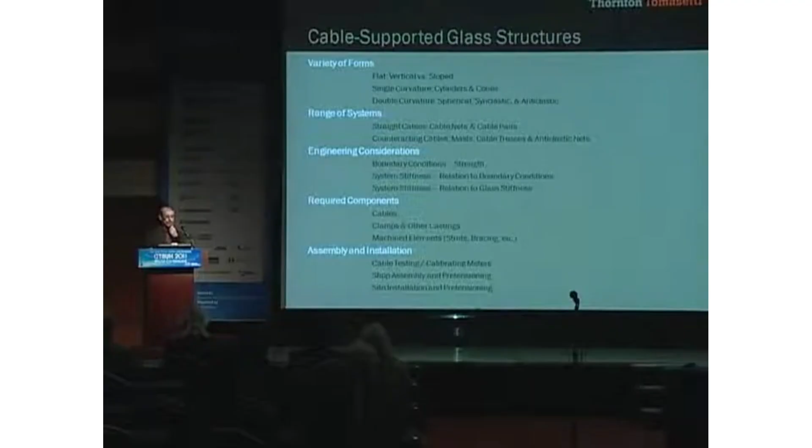This is what I was hoping to talk about, though I don't think we'll have time to cover all of it. First, I want to talk about the variety of forms available with cable-supported systems. Then the types of systems there are. We'll cover some engineering issues, especially boundary conditions. And ideally, we'd like to talk about some of the required components as well as installation issues.

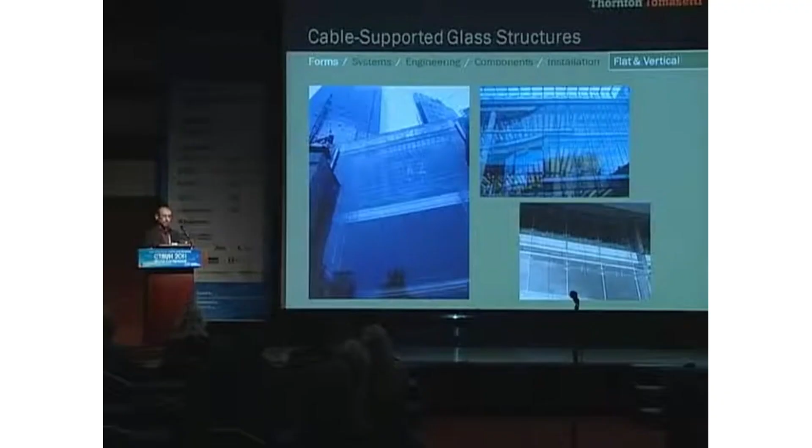Okay, so forms that are available. You can do them flat and vertical—it's nice and simple. Or you can do them flat and sloped. But flat and sloped, you would think is the same, but it's not. I'm not used to using a microphone because I need to stand in front of you, so I'm going to shout a little bit. When you have a flat building, a flat facade hung with cables, it just wants to hang straight. But as soon as you want to slope it and lean it back, now it wants to hang like a wet towel.

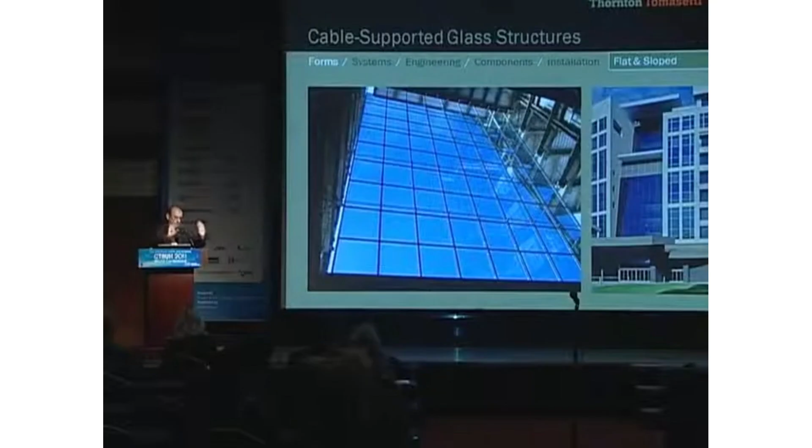So the middle wants to sag. When you work with these kinds of systems, you have to engineer and detail a series of props so that all of the points actually push the glass out into a spherical pattern. But when you add the glass weight on, it actually deflects back into being a flat form again. So this is a lot more complicated than it looks.

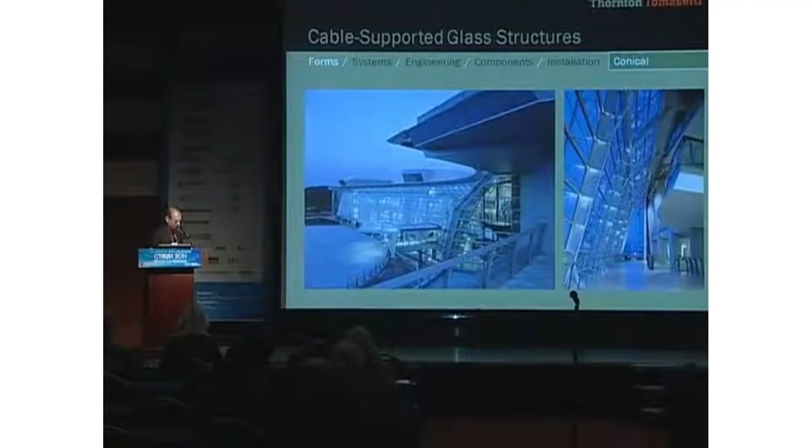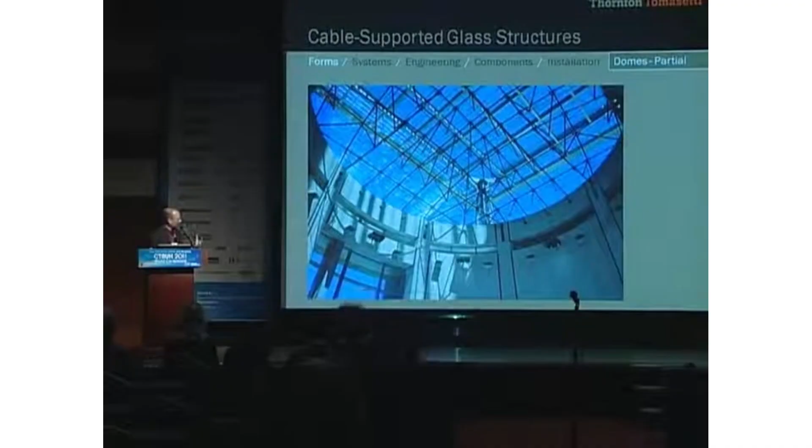You can also do cylindrical shapes, whether you're putting the framing to the inside or to the outside. Again, you can do conical shapes, which are sloped cylinders, and again you have the same problem of the wet towel, so you have to prop everything forward again. Then you can do dome shapes, hemispheres. And hemispheres aren't always hemispheres—sometimes spherical forms are just kind of a lens, which may be the top of a hemisphere.

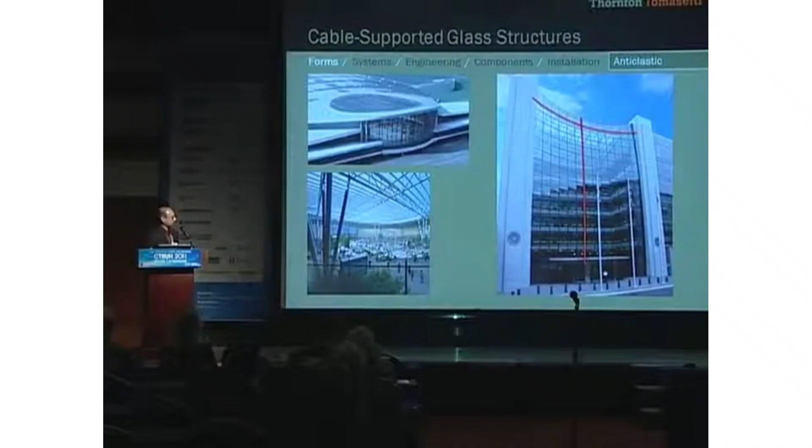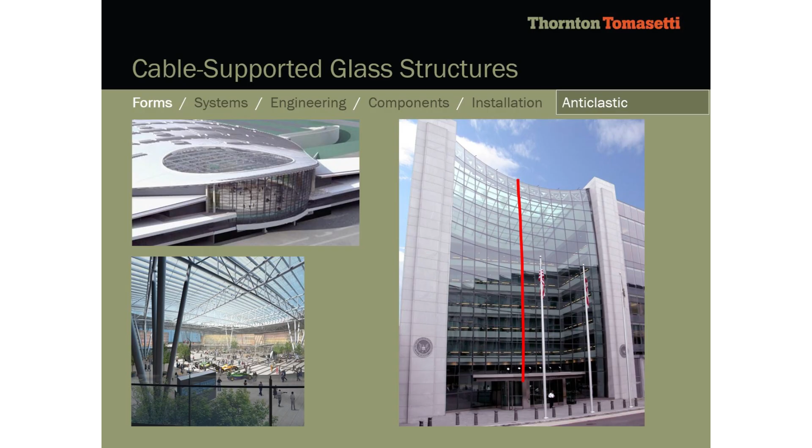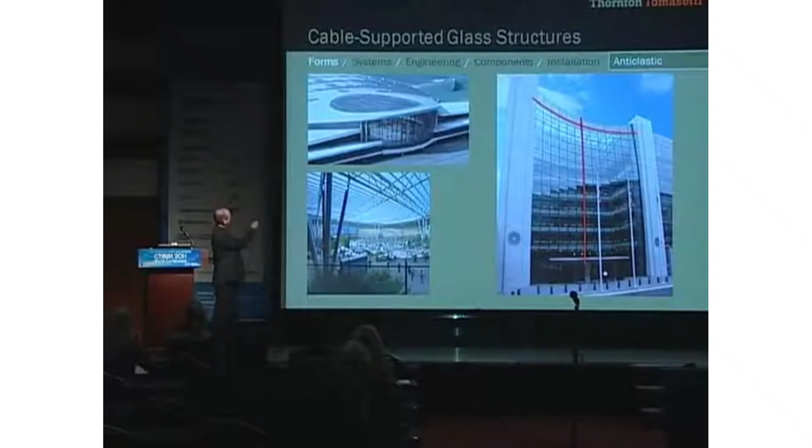And then lastly, we have something called anticlastic. Anticlastic is not the opposite of clastic—anticlastic is the opposite of something called synclastic. What it means is that the curves that generate the form have their radius on opposing sides of the form. If we look at the horizontal, this curve is concave, facing out towards all of you. But the vertical curve here is convex, facing back into the building. So the form is generated by two sets of curves, but from opposing sides of the form. This is an anticlastic form, more commonly called a potato chip or a saddle shape.

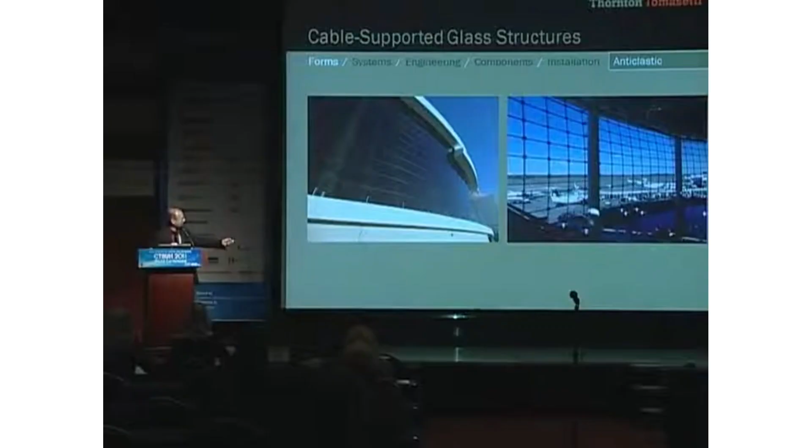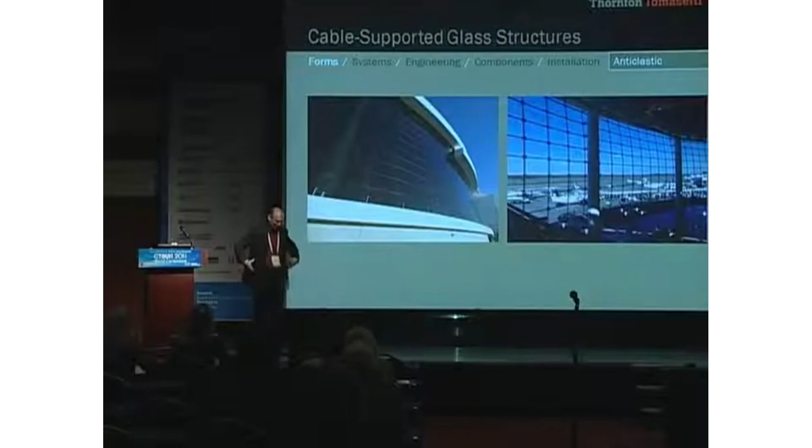This is a fantastic example, SeaTac Airport, of an anti-clastic wall. It's basically just a cylinder form, with a series of cables running horizontally. When you pull those horizontal cables, essentially it's like putting on a girdle. You start maybe just vertical and flat, but when you pull them tight, now it pulls in the middle.

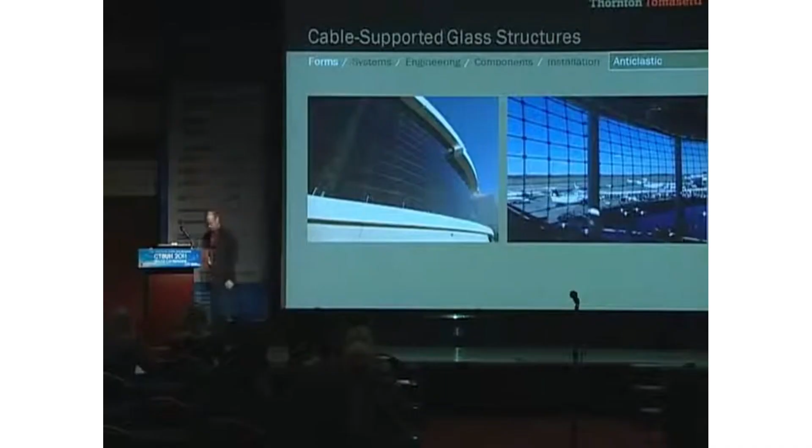And it creates this anti-clastic form. So really, this is just generated by the two cables pulling against each other. The horizontal cables are pulling around the building, which is curved, and the vertical cables just want to take a straight line. But because of the horizontal cables, they actually pull in, like that.

Okay, so now let's talk about systems. We have cable nets, and this is actually a cable net. I only refer to these as cable nets. This means that we've got two sets of cables, one running horizontal, one running vertical. It's a true net, if you will.

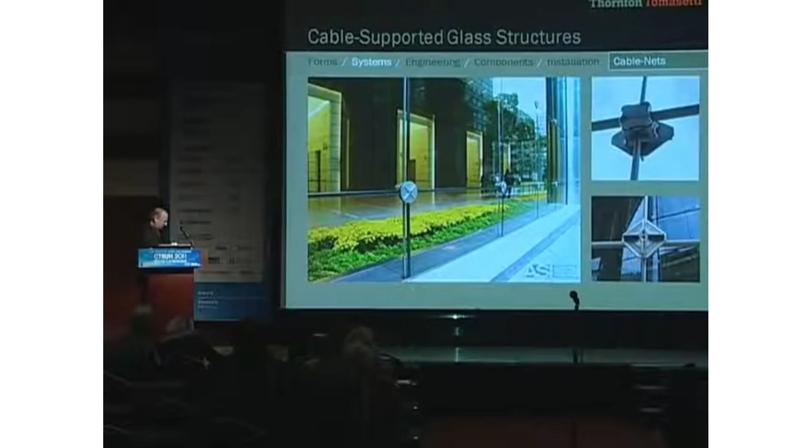You can do anti-clastic forms with cable nets. This has two cables running both directions. This is pairs of cables, though, so I don't call this a cable net.

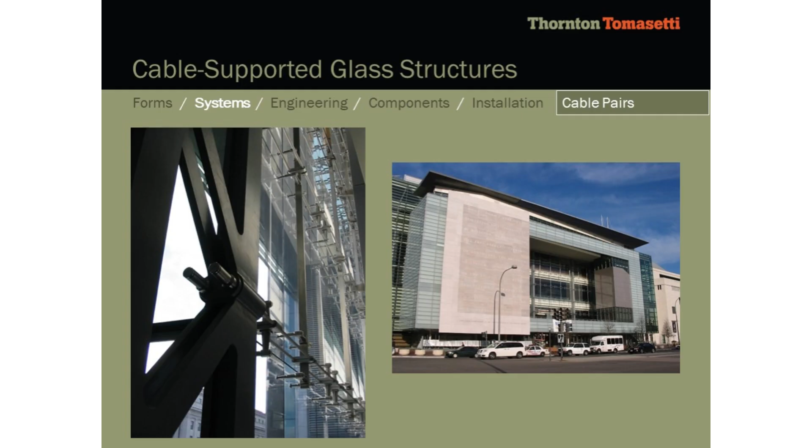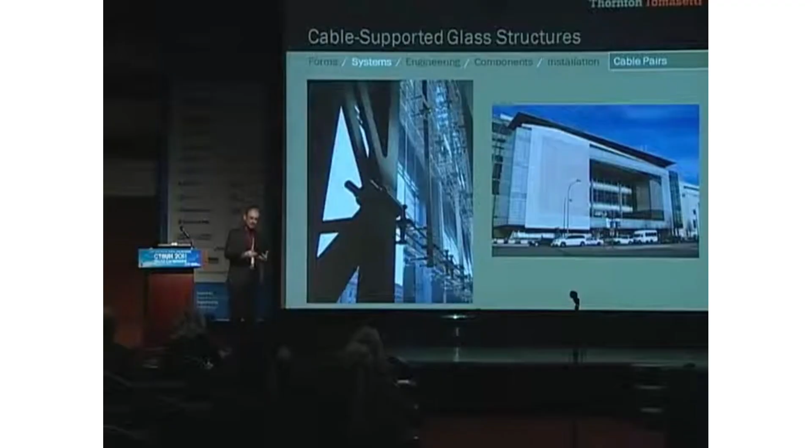So if you see here, there's pairs of cables running horizontally, and then there's stainless steel hanger bars, which take the dead load of the system. So it's very similar to being a cable net, because if it was a cable net, we would have a vertical cable here and one horizontal. But since we lost that one vertical cable that's no longer acting in tension, we basically had to take that vertical cable and turn it horizontal and add it here, because we still have the same structural requirements. We still need the same amount of tension in the system.

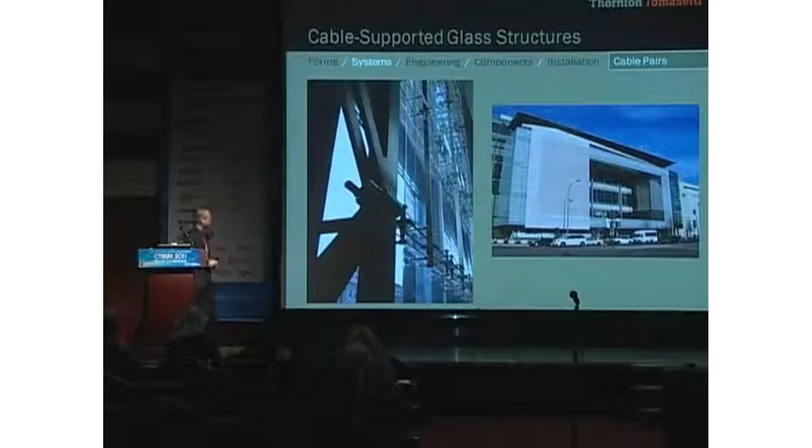So another example of horizontal cable pairs, again with a steel system being the suspension or support for dead load.

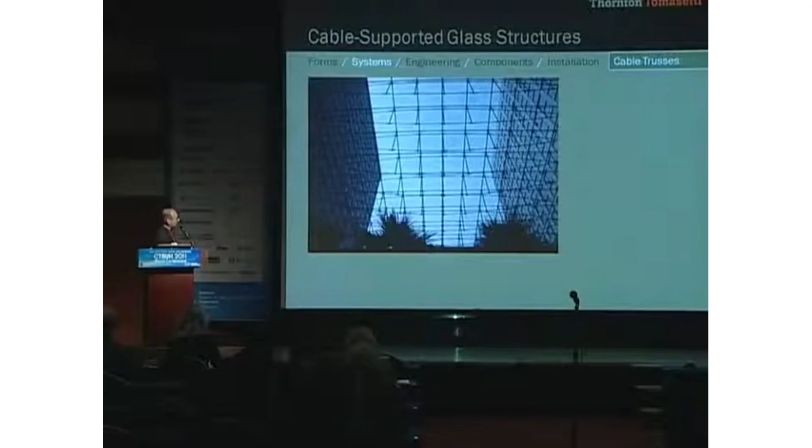So then the next system would be cable trusses. And cable trusses have cables which basically oppose each other. This is very similar to the anti-clastic cable net, where basically you've got one set of cables pulling down on the skylight, and you've got another set of cables that are pulling up on the skylight. And basically they resist each other, and they resist positive and negative wind loads.

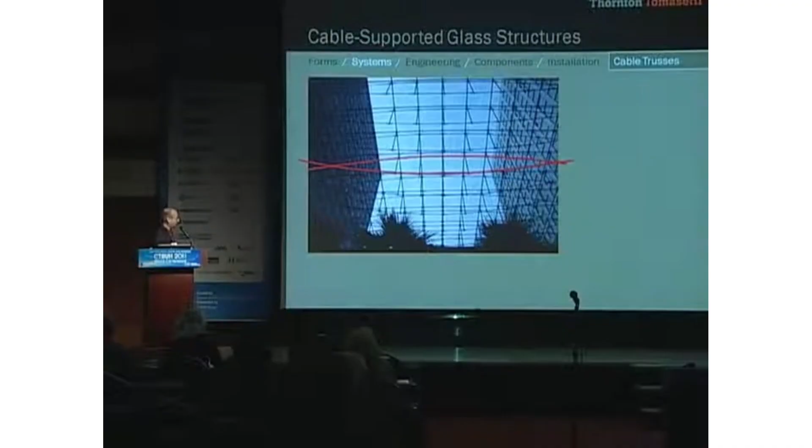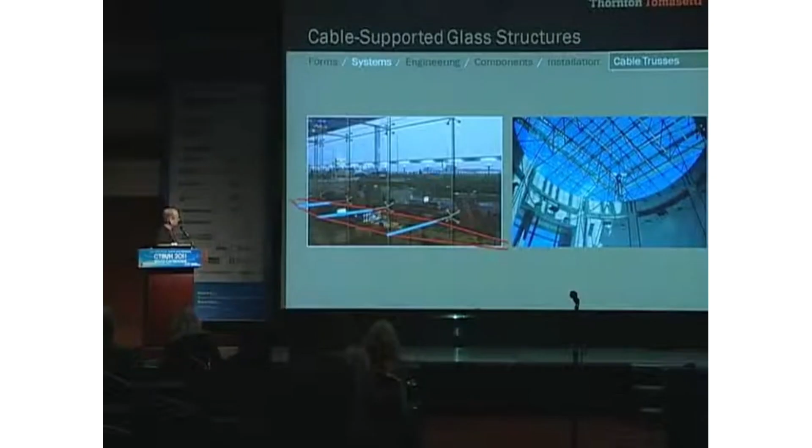These are more cable trusses. There you can see the horizontal cable truss. And these are the struts that you use in order to keep those cables opposing each other. So this is a cable truss in plan view, maybe.

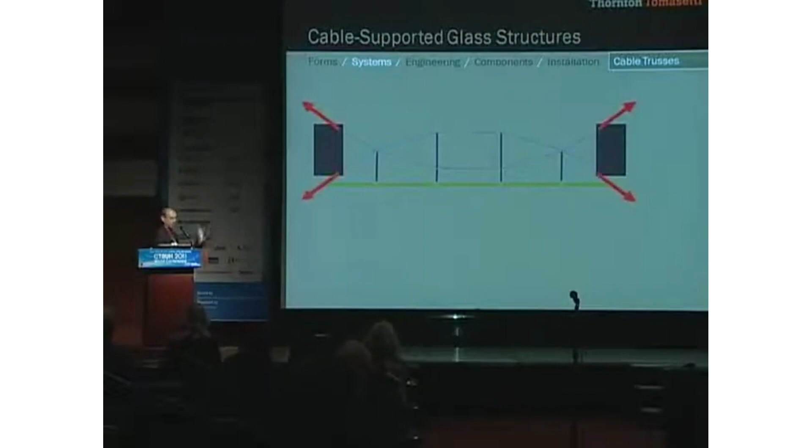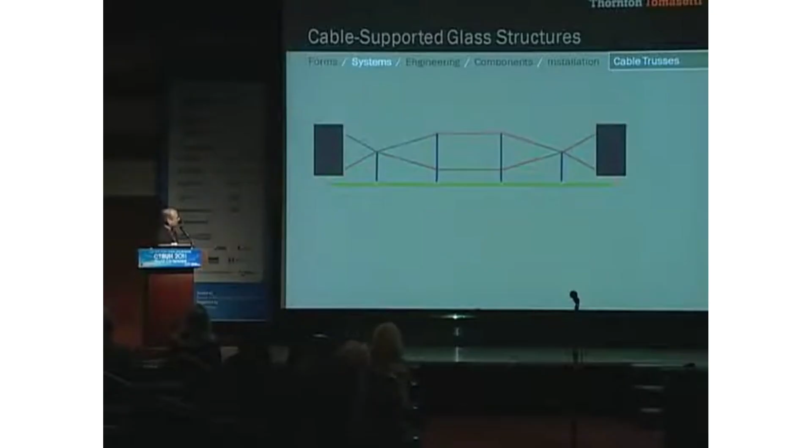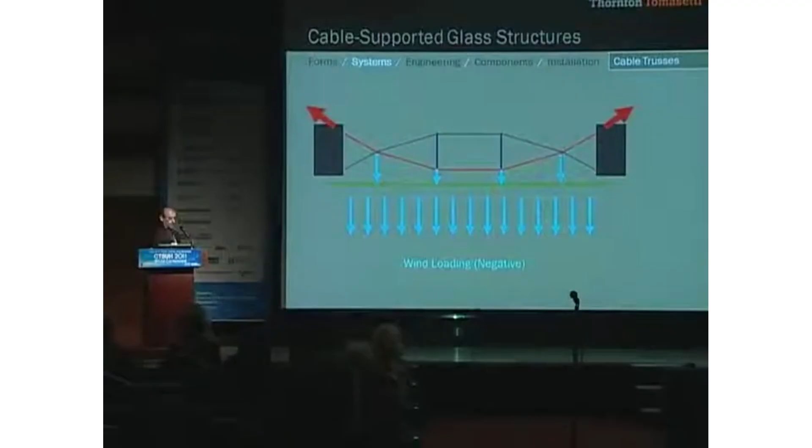And the way they work is that you tension the ends, and then that puts the cables in tension. And then they remain pre-tensioned like that for the life of the job. But now we apply wind load, and basically the wind load transfers through those front struts, and they apply it to the back cable. But if we apply negative wind load, then it works the opposite. Now it's pulling on the back cable or front cable, depends how you look at it.

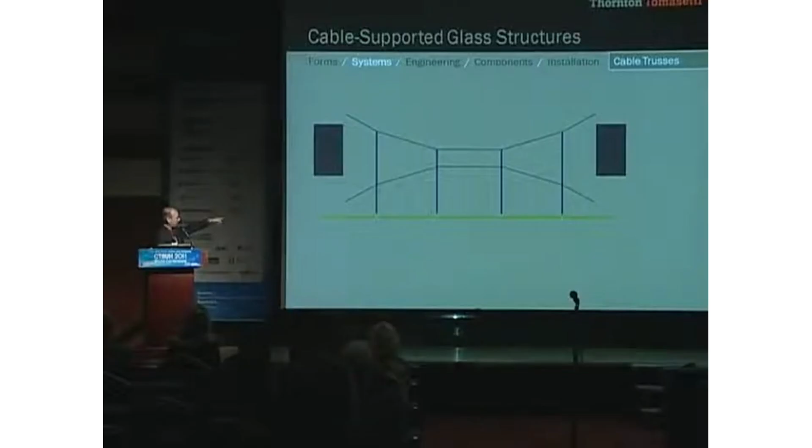So as an option, you can pull those two cables apart. They're still the same diagram. Or you can move them to the back, and again, it's still the same diagram. It's just that you've moved the positions of the cables. The loading still works the same. Except here I'm not attached to the columns, so it's an obvious problem, right?

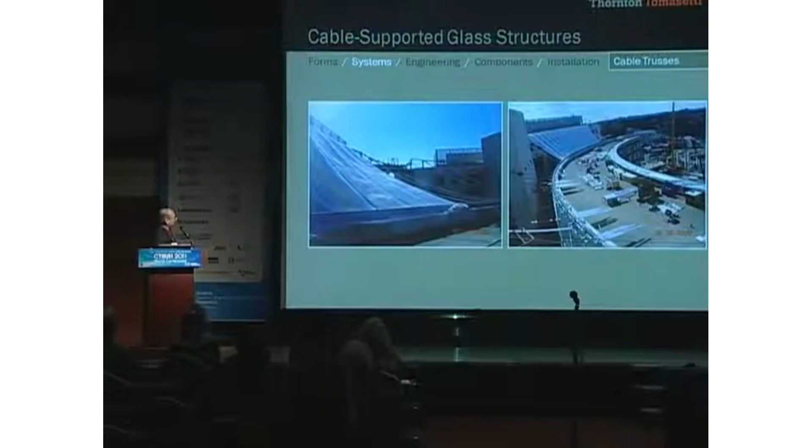So this is a job where we're supporting ETFE with cables. And so what I've done is I've drawn in, you can see the cables running back here. You can see all of these. They look like they're just sagging from self-weight. But actually what you don't see is there's another cable below them that's pulling the system down and keeping it tight and rigid.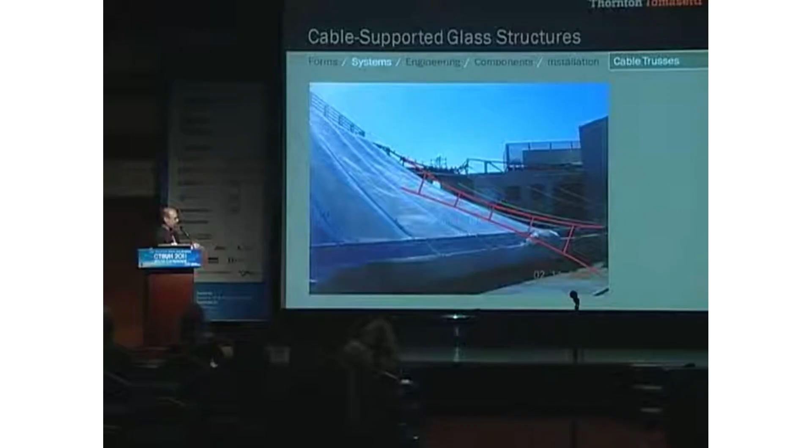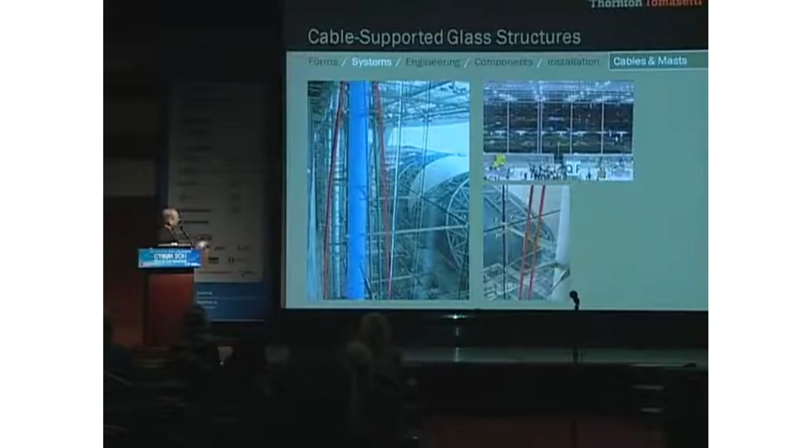This is Bangkok International Airport. This is a mast system where we basically have a compression mast which goes down the middle of the system, and then we have a cable in the front and a cable in the back, which is doing the same thing as what we were doing in the cable truss, except instead of pulling on the structure itself, the columns at each end, now we're putting all this load into this compression strut. So we're actually isolating all of the cable loads to go up and then get to the top and then come all the way back down through the compression strut again.

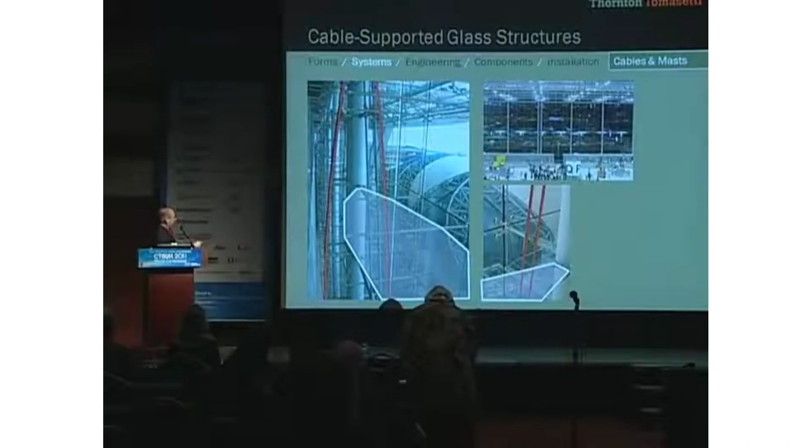So it's kind of a self-contained tension system. But if you look carefully, we also have tension trusses in here as well. They go side to side.

This is another mast system. You can see the front and back cables with the mast in the middle.

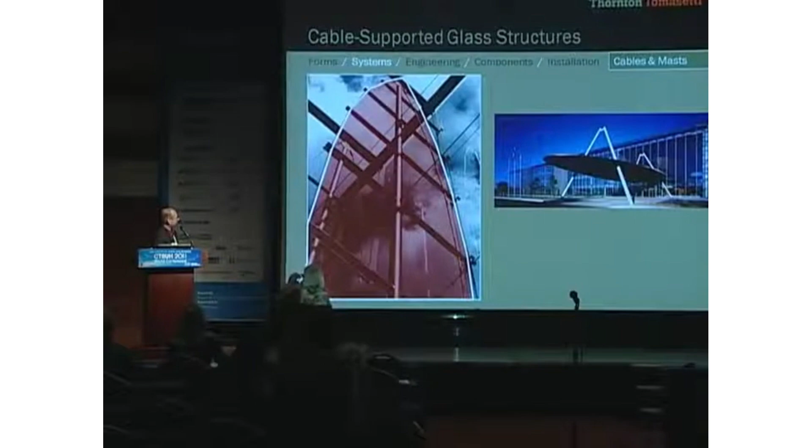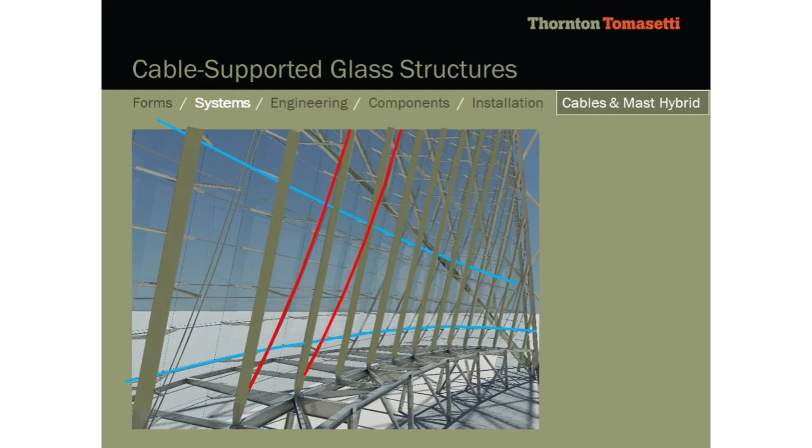This was a hybrid system I developed for a project in California. We have a series of vertical masts, but they only have the rear cable. So what do we do about the front cable that's missing? There should be a front cable putting load from the outside to keep the system balanced. Since it's already a curved facade, we use the horizontal cables that run directly behind the glass and tension them from each end. That helps pull in the facade, whereas the vertical cables push out. So it's a hybrid system.

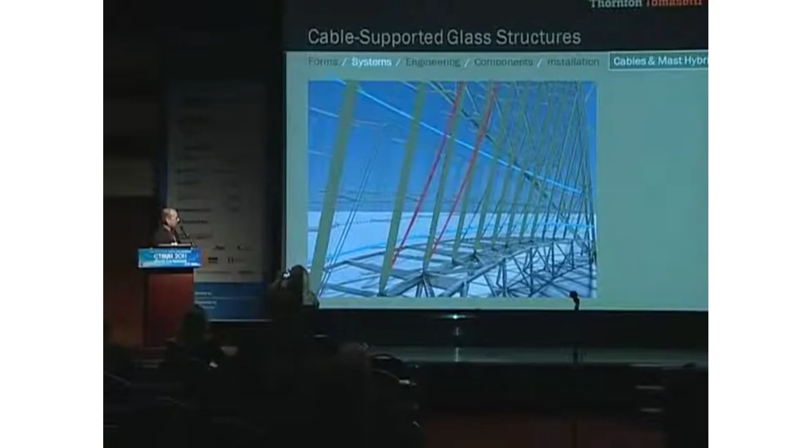So there's the horizontal cables being activated to resist the vertical cables.

Let's talk about engineering and some of the boundary conditions we need. There's a lot of load in these, and I meant to print myself a cheat sheet so I could tell you how much load, because I don't keep this in my head. Maybe 30,000 pounds would be common to have in these cables for pretension.

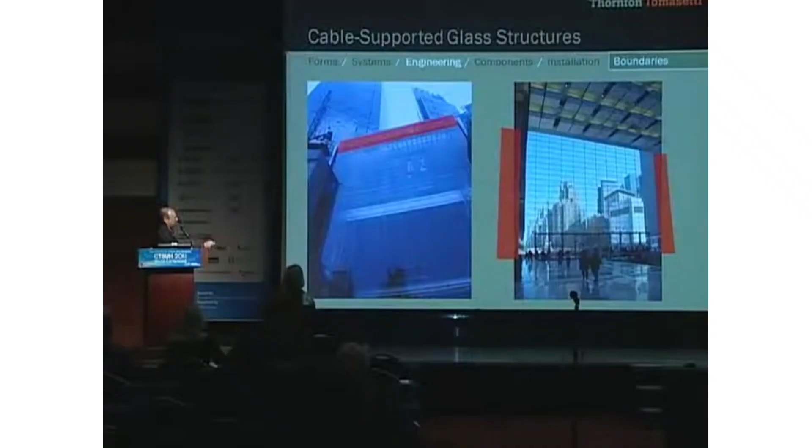So what do we need? You need a very big truss at the top to take the tension load of these vertical cables. You also need concrete piers or concrete decks on the left and right to take the horizontal loads. This is that vertical truss at the top. That truss isn't doing anything other than taking those cable loads.

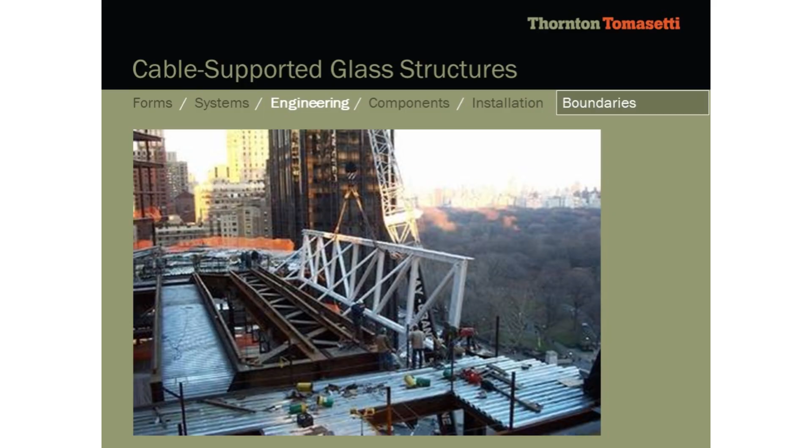Frequently we're asked to do cable structures where there's really no provision of structure. We have to tell the designers or the clients, look, I'm sorry, the way the building is right now, you really don't have the capacity to take the cable loads.

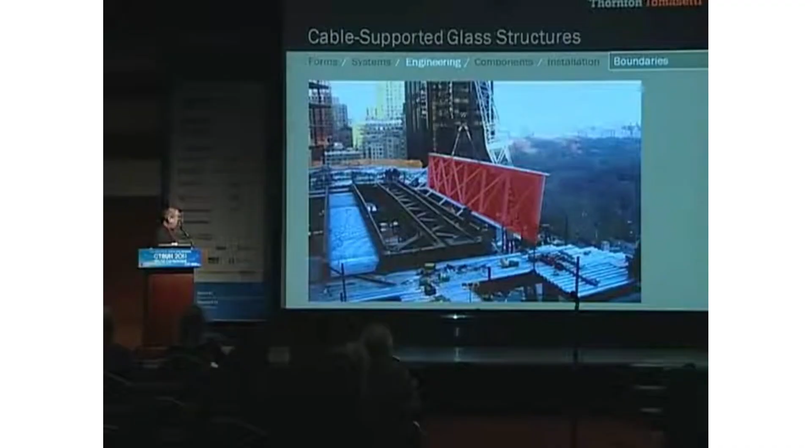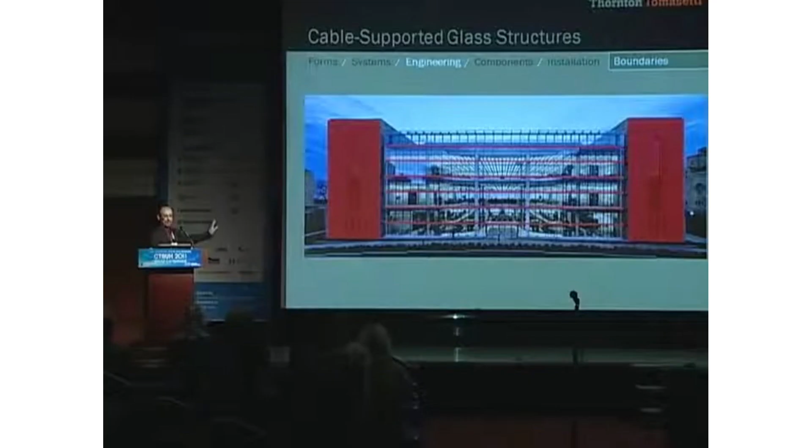This is one of the three jobs I actually built as a contractor. This is where the horizontal cables are located, and that's what's resisting the cable loads. We have massive concrete piers at the left and right ends of the building, giant bookends.

So what about the Qualcomm project, another one I built? That's the horizontal pairs of cables, but it doesn't look like there's much resisting these over here, right? There's no big structure at the left and right. But if you notice carefully, there's no cables here. Why? Because there's no structure there.

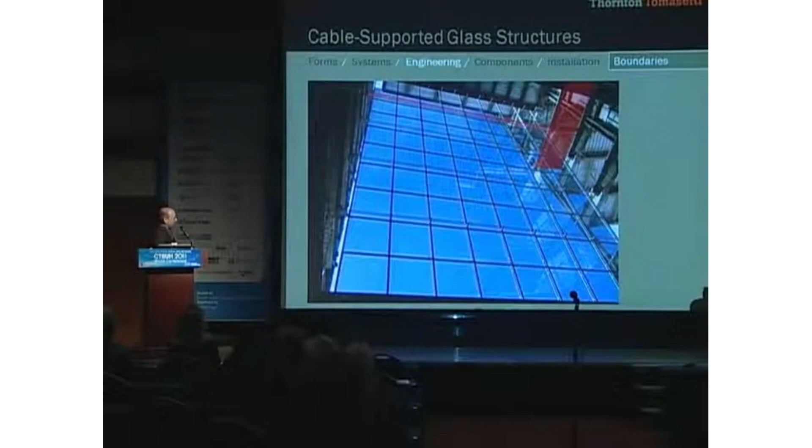This top set of cables comes all the way across and ties right into a floor deck. If you look carefully, you can see the drag beam, which pulls this force and disperses it back into the building. If we keep going floor by floor, you realize all of the cables are tied into the floor decks, and the floor decks act as diaphragms to carry these loads back into the building.

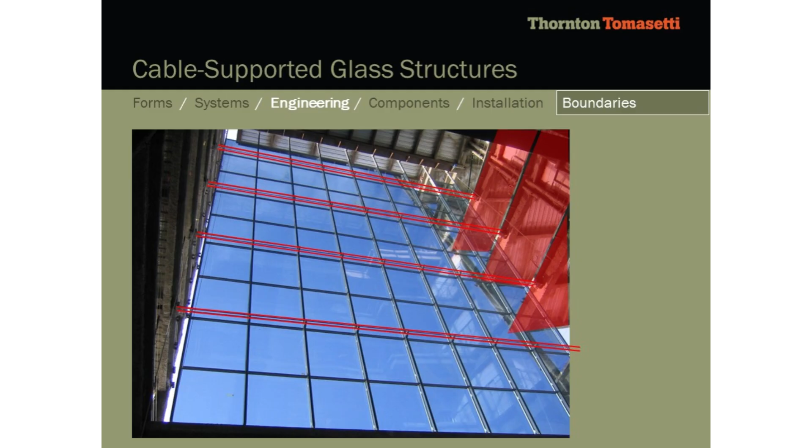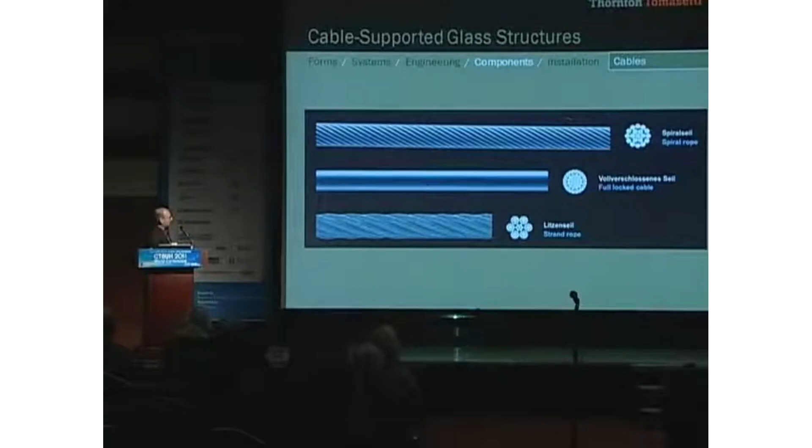Okay, so components - we have cables, and they're pretty important for cable-supported walls. There are three kinds, but we only really use two. This is known as strand, which is what we most commonly call it. Here they say it's spiral rope, but we never call it that. This is one set of wires which basically revolve around a central wire.

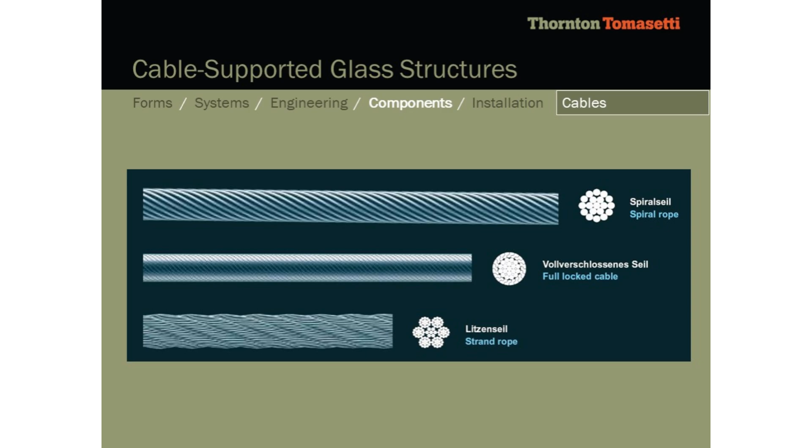Then we have fully locked cables, which more or less have a conventional set of wires in the middle, and the outside is a series of die-formed wires which interlock carefully. At the bottom we have what we call rope. Rope is more commonly used for elevators because it's much more flexible. It's also used for other structures where flexibility is required. But mostly for the jobs we do, we're either using strand or fully locked cable. Fully locked cable is a lot more expensive, so we tend not to use it. Usually we're doing strand.

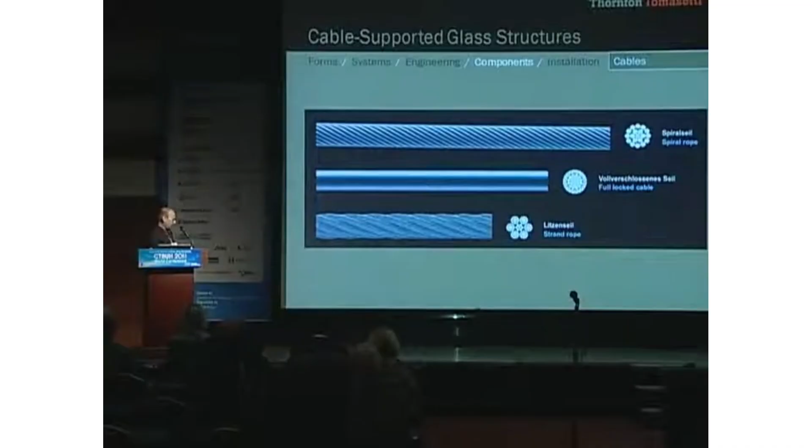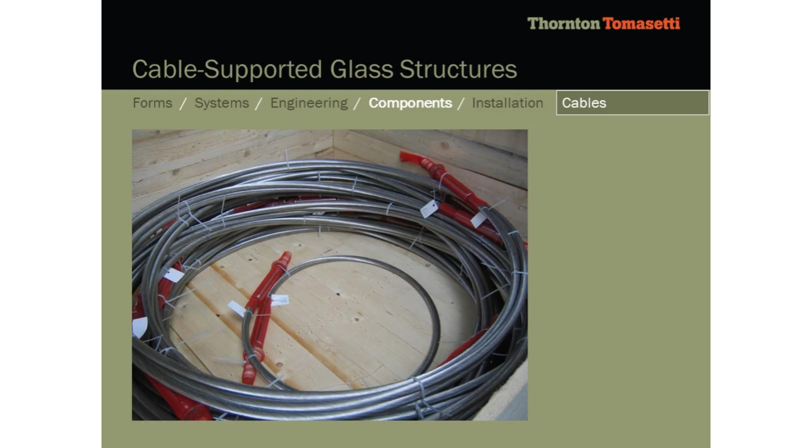This is what it looks like when it's in a box - looks like spaghetti laying in a box. It looks very lightweight and simple, but these are very heavy ropes. This is probably 28 millimeter rope, so that's 1 1/4 inches or 1 1/8 inches. Pay attention to this short little one here, I'll show you this a bit later. Every time, as a contractor, we ordered a set of long ropes for a job, we also ordered a short one for testing. It's exactly the same construction, same strand, and same end fittings. This end fitting here is called a swaged fitting.

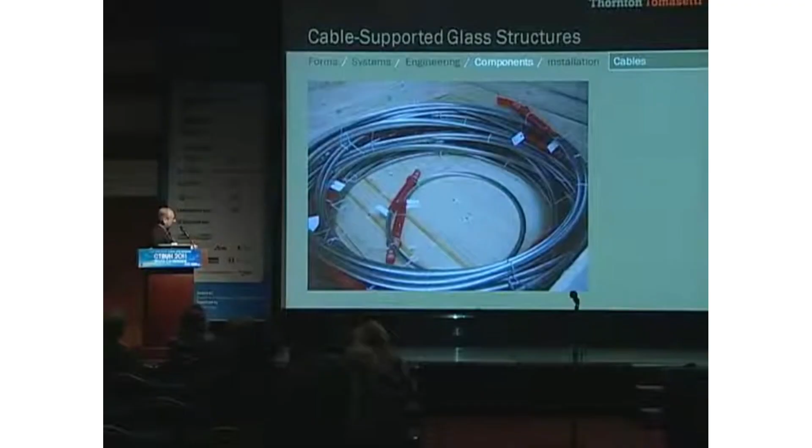There's a series of tapped threads here that are cut, and then we've got the basic swage, which this rope or strand cable comes inside of. So the way this works: the threaded portion is tapped into a solid block, and from the left side we've got the cable, which we bring and drop into this hollow sleeve.

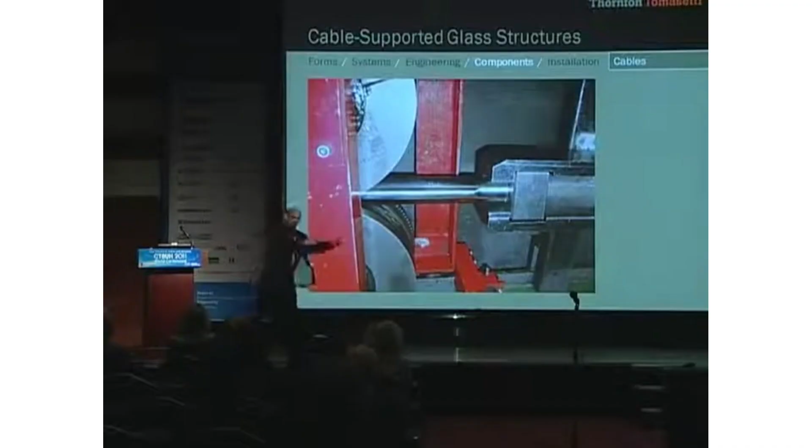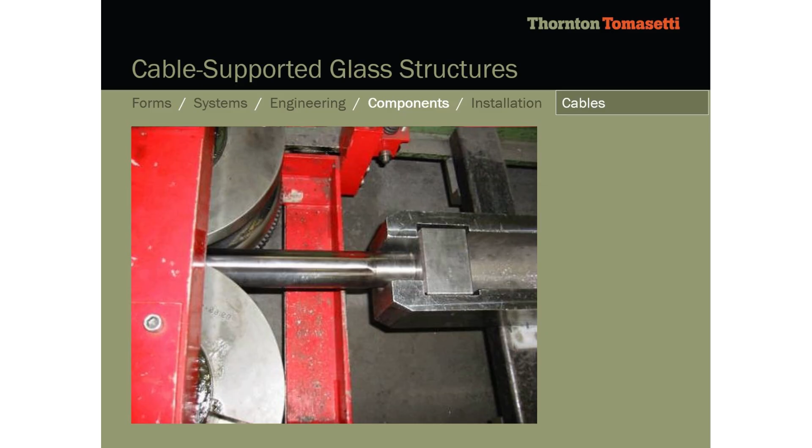This wheel here and this wheel down below are very large hydraulic rams, which press together on this hollow tube. Then by grabbing it here, they actually pull the hollow tube through the rollers, and you can see the deformation of the stainless steel sleeve. So basically what's happening is they're taking this hollow sleeve and squeezing it onto the strand rope.

That's important from an engineering standpoint to know that you're dealing with something that's been squeezed onto the rope, because the failure mechanism for those kinds of fittings means the rope will actually pull out of the sleeve before the rope itself will fail. So there's always a 0.9 factor whenever you're using those kinds of ropes or end fittings. Those are called swage fittings.

They differ from something like a spelter socket. A spelter socket is shaped like a funnel. You put the cable through, then you pull it apart, and then you put grout inside, and then it cannot pull back through the funnel-shaped fitting.

Whenever we do cable systems, we always have castings. These are called investment castings. What we do is we have a die form that we inject wax into, and for every casting we need on the job, we have to make one piece of wax. So what we've made here is a clamp, using these two die forms together to inject this wax and create this one clamp shape.

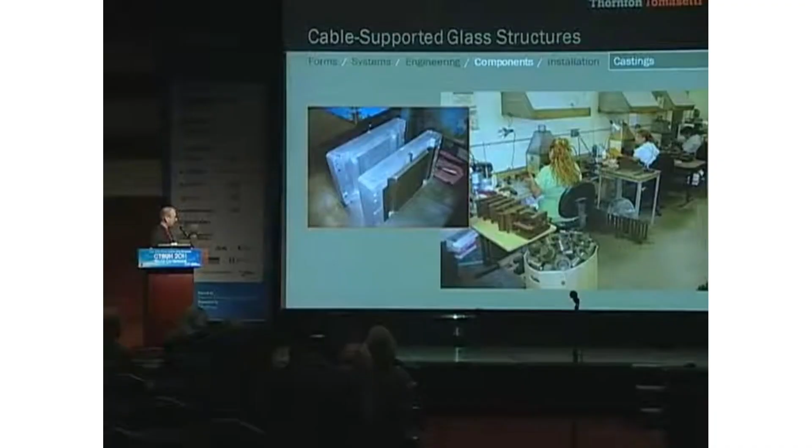You can see this little nib here—this is where the wax was coming in. So now all of these ladies are basically taking this piece, cutting off the injection point, and then tapping on these other pieces which create the flow tunnels for the stainless steel to enter into the hollow void later. So we start with a solid wax, and then they dip that solid wax into powder, which is basically ceramic dust.

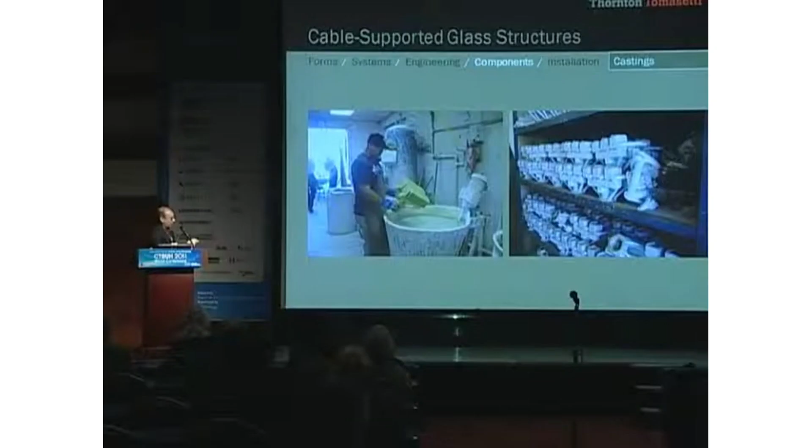You can see here, these are castings that have been coated with the powder dust many, many times—they have a thick layer on them. That's ceramic. Then we take that ceramic and put it into an oven and fire it, so now it becomes a ceramic shell, and all of the wax is drained out because it was hot. So now we take that ceramic shell and pour stainless steel back into it, and these are the castings that were actually made for that Qualcomm project.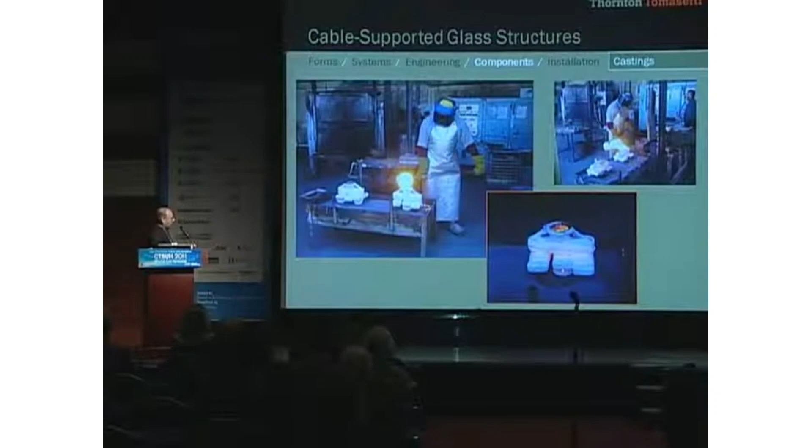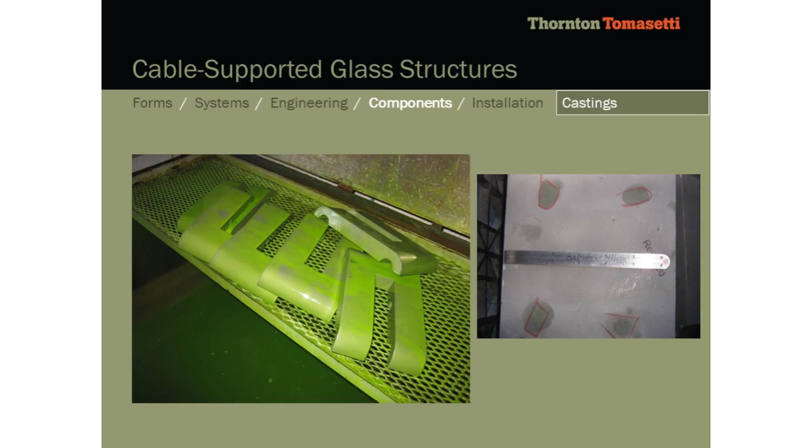Then we have to take them through a non-destructive testing process. Here, unfortunately, you can see the word 'rejected' underneath the ruler, and this is why it's rejected: all of these stains are residual dye, which is residing in some kind of crevices and cracks.

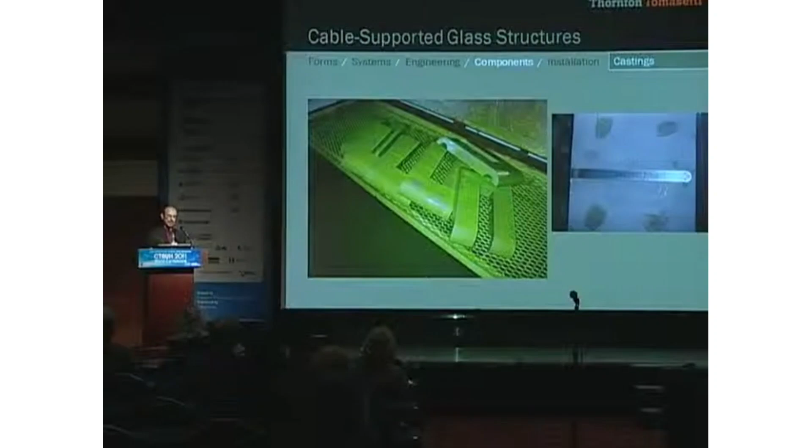So now they have to send these back. They have to drill out the defects, then weld in stainless steel material, regrind it, re-sandblast it, and then take it back to NDT testing again. It's a very long, arduous process to deal with castings.

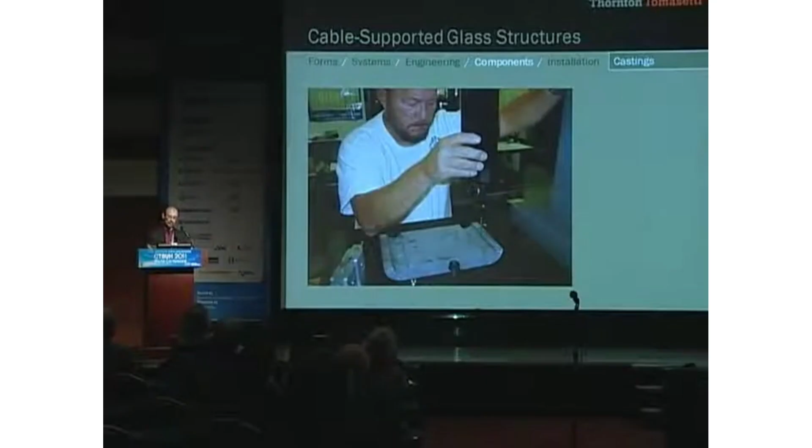Then once you've got that, you've got to machine them. This guy is checking for the precision of the casting so he can put it in his CNC equipment. Once he gets it in the CNC equipment, if it doesn't register properly, he can't drill on it properly—so if they don't register properly, we have to send them back out before he machines them.

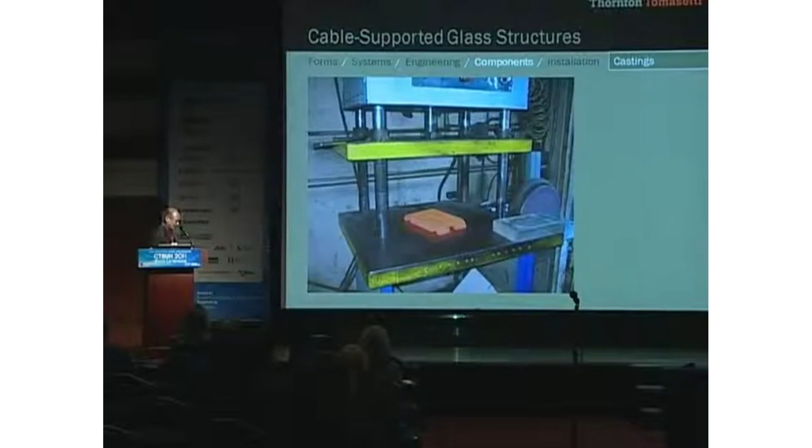We have to reheat them, and then we take a hydraulic press here and ram it down to flatten the casting so it's not warped. Then he can work on them again. That's what it's supposed to look like when we're finished.

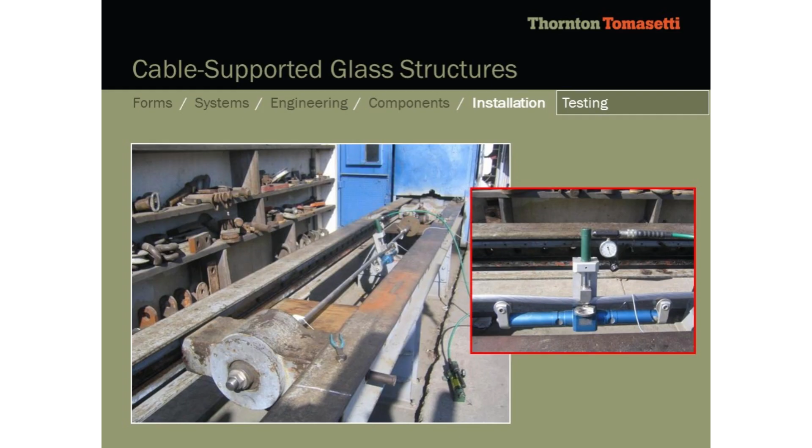This is the testing I was talking about with the short cable piece. We actually use this to calibrate this equipment, which we use on site for checking our tensions. It's called a tension meter.

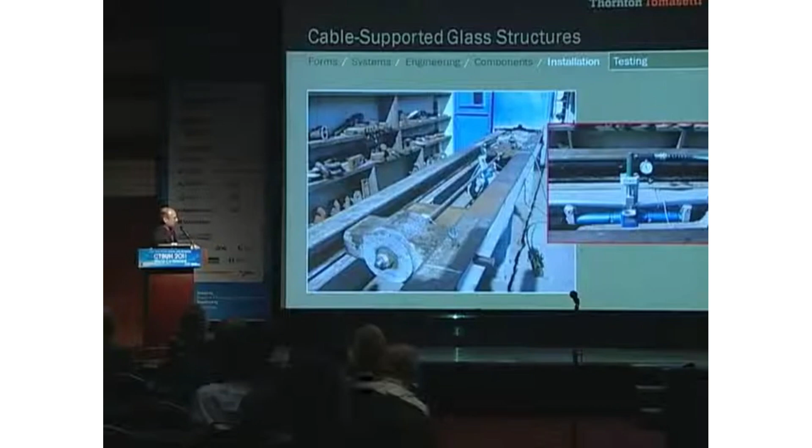So we first pull it to the correct load. We calibrate this tension meter so we can use it on site. Then we remove the tension meter, and we go ahead and pull the cable until it breaks, and we verify what load it actually broke at in order to confirm our engineering.

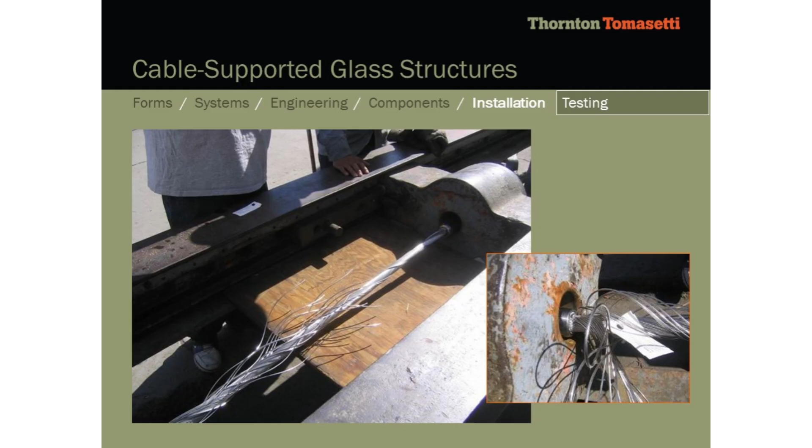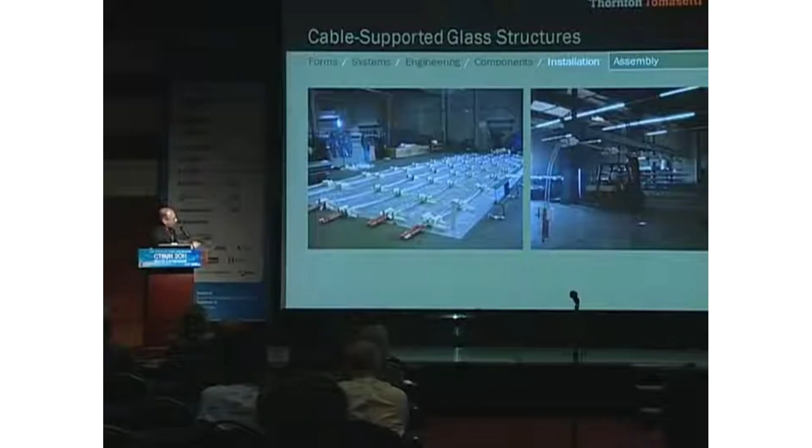Sometimes there's pre-assembly in the shop where we pull sets of cables together and preload the clamps. We design the spreader bars here for lifting, and this spreader bar will be sent to the site in order to install. This is us putting it on the truck.

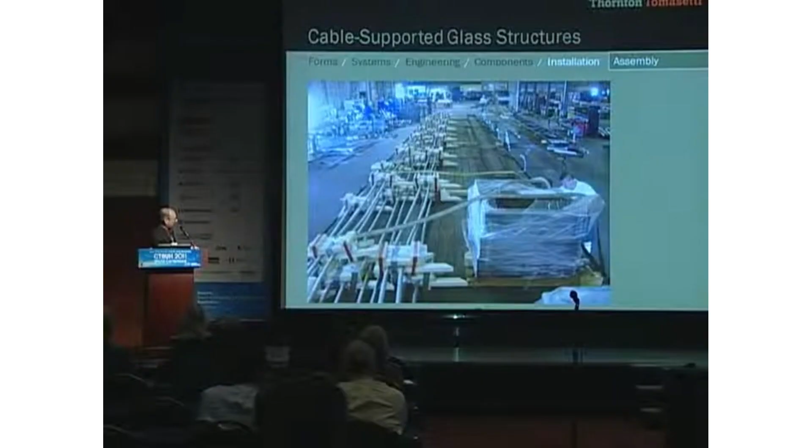Here's the spreader bar I was talking about. Here's the compressors. Here's the spreader bar again being used on site in order to lift the cables. These are the cables here.

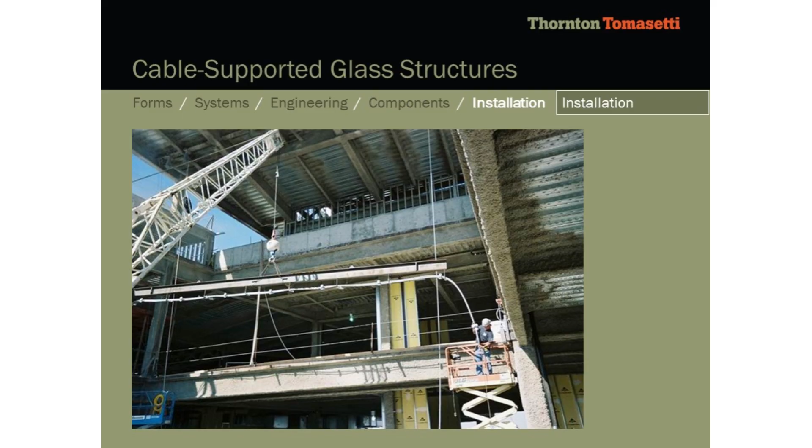You can see the guy's got a pair of cables which he's going to load into the floor deck here. This is him loading it into the floor deck and trying to make the connections. And then finally doing the jacking equipment. These are called jacking chairs, which we design as well. Attaching the hydraulics.

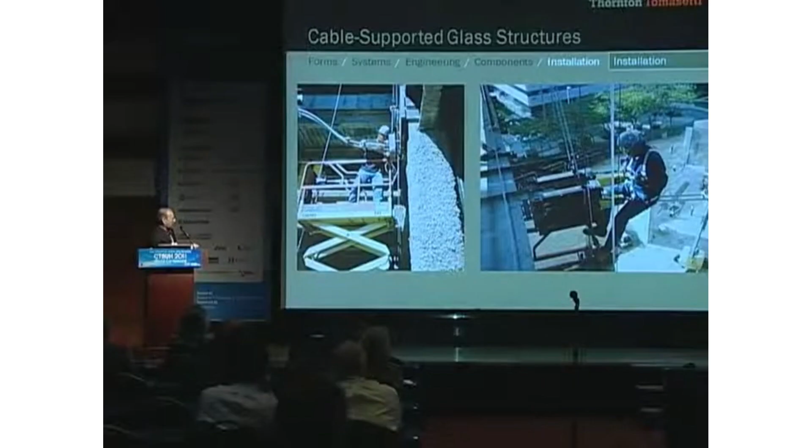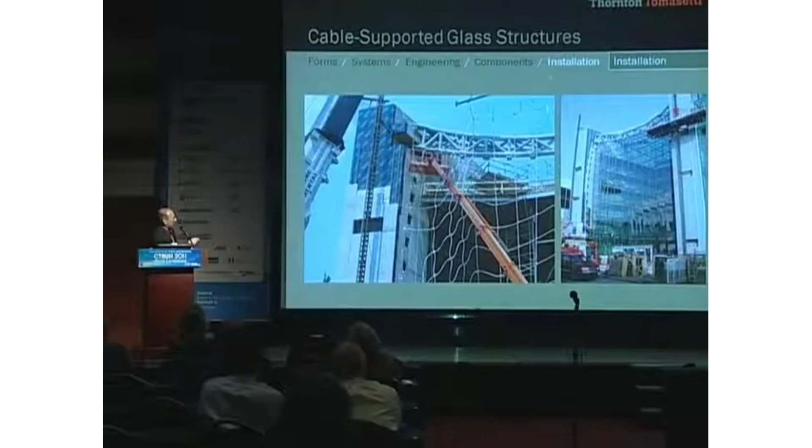In this case, the entire cable net was pre-assembled and then hung like a big drape. Here you can see a big spreader bar at the top. Some more samples of jacking equipment that we have to design and engineer as part of our design process. And then this is the finished wall.

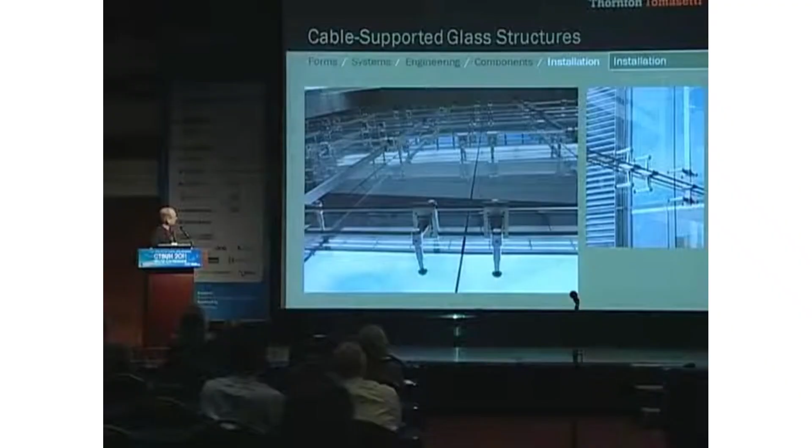Thank you, Mark. If you just wait there, if you wouldn't mind, for questions. That was incredibly informative. I now know what anti-clastic means, and that was very, very useful.

Okay, well, I'm going to kick off. I've actually got a couple of questions, Mark, and your answer might well be related to both of them. I just wondered, as a designer, what gives you the biggest headache? And also, what are the situations and areas that these sort of systems are being used in now that perhaps wasn't the case 2 or 3 years ago?

Yeah, so actually, that was one of the reasons that I proposed this talk for CTBUH is I've been working on several high-rises recently where people have been trying to propose cable net systems quite high up on the building. The difficulty is in trying to get the structural provision that can resist the cable loads that we need. Especially in a place like Shenzhen or Hong Kong where the wind loads are extremely high, the amount of pretension that we need in the cables is just enormous. The higher up in the building we go, the higher the loads go, but typically the less structure we have from the building in order to tie into. So that's certainly one of the points of the lecture, to emphasize that idea of needing those structural provisions.